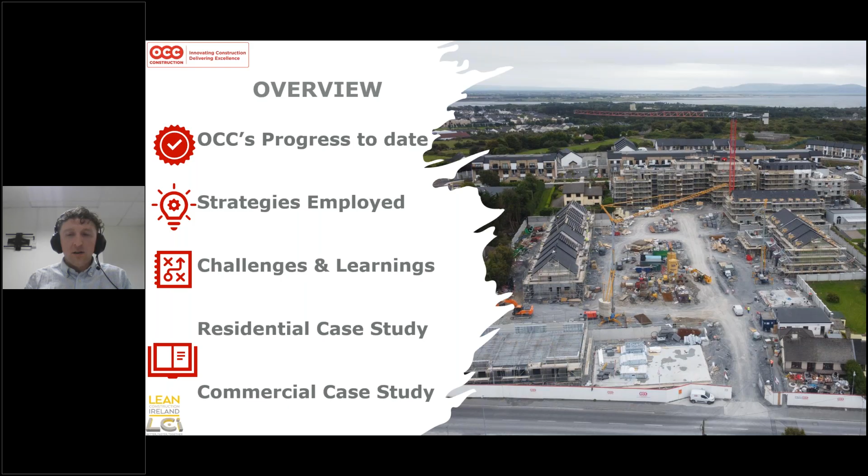Our lean construction journey started in 2021 when we identified the problem. Traditional build and delivery was not achieving results for OCC. There was a shortage of skilled labour, too many contractors on sites, sites running behind programme, and generally everything was working out of sync and we were failing across all sites.

So obviously we had to make drastic changes. Step number one was looking at changing how we actually build our houses. So we looked at the implementation of modern methods of construction and lean manufacture.

This led to us building our own off-site construction company called Greenframe and developing our own light gauge steel product, which is based out of a manufacturing facility in Derryfetta in northeast Galway.

This allowed us to focus in on the structural elements of our buildings and maximise efficiencies on our factory floor, take away any dependence on weather and so on, and really ensure that we can get the best value for money and minimise as much waste as possible through the manufacture process.

Our next step then was design process improvement. This is focusing on collaborative planning and workshops at early design stages, including the subcontractors as part of our design team on design and build projects.

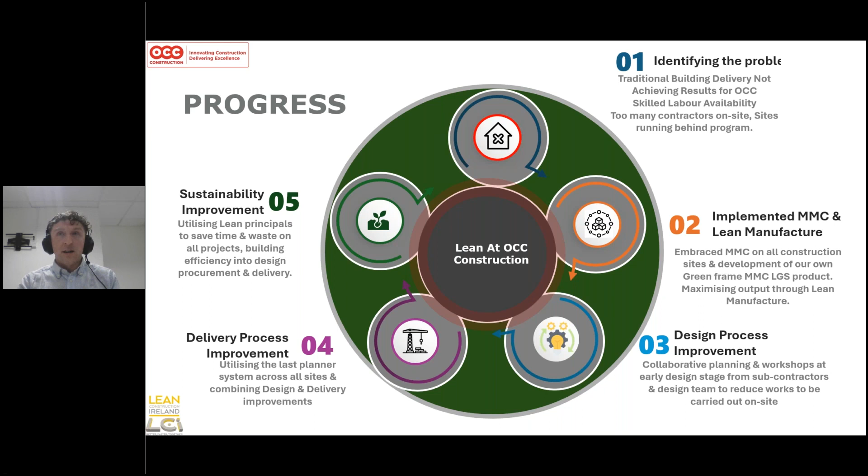And the final step and what we're on at the minute is sustainability improvement. So this is bringing all aspects of the business together and utilising lean principles from purchasing, from an initial pricing through to delivery, including purchase and design and at handover stage.

So just a couple of benefits from the past 3 years of utilising lean construction across our sites. We've gained a greater sense of cost certainty on projects because we're guaranteeing meeting tighter programs across our design and build projects. To date, all lean construction projects have been delivered on time.

And we're decreasing the program. Overall, we're looking at a 20% saving in comparison to where we were in 2021 with traditional building methodology and no real great organisation to where we are now. This does result in a lot of overheads savings, and also the maximisation of labour resources saves a lot of money for trades on sites.

Regarding quality testing certification, because we've had greater collaboration at the early stage of the project from subcontractors and the design team, we're finding a lot less issues when it comes to getting material certification and fully compliant systems brought all the way through the construction process, because it's delved into deeply at an early stage rather than being drip fed throughout construction.

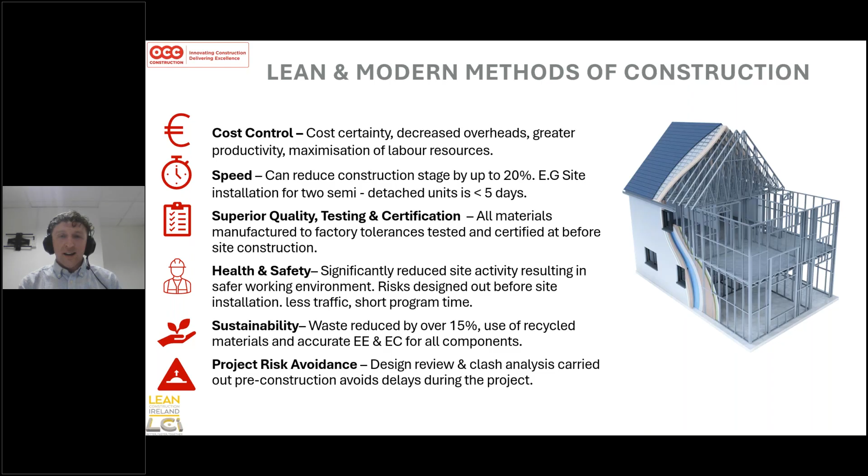So just looking at the current strategies employed, we've invested heavily in MMC. We're aiming to maximise the capabilities of the latest technology, primarily in light gauge steel, but we also use different building types depending on the site.

Looking at design improvement, we've created our own light gauge steel product, Green Frame light gauge steel, primarily used for construction of buildings between 3 and 5 stories. That's the sweet spot for that system. It's currently 250 units ongoing. And in commercial, we are utilising timber frame when we've units of 1 to 2 stories.

Then looking at process improvement, so how are we making things better on site? We are utilising insulated concrete forms where applicable on site, and then looking at actual construction delivery, we are implementing the last planner system fully, from initial idea conception through to handover.

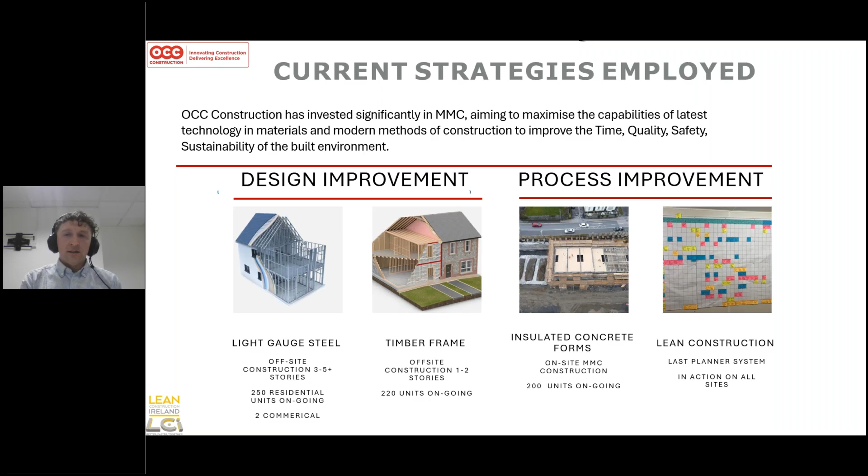So I pulled this together just to show you basically what we are using in OCC as part of the last planner system. By no means are we experts, and I know each company will be different depending on how you're set up and what projects you're on, but this is how we are running our last planner.

Starting off, you'll have your master scheduling, which typically is the full duration of the project, and it can take the form of the picture on the right hand side there, which is a phase plan, but it'll be fully expanded. The idea of it is to get your full construction program on one wall in your meeting room.

And this will set your phase durations for the project, which you can break down into your look-aheads, and it'll identify any major constraints of overlapping trades.

Then we move on to phase planning, so what you should do. This is your pull plan system. Based on the phases you've broken up in your master scheduling, you pull together a phase plan like is pictured on the right hand side. And this is built with the subcontractors on board.

I know with procurement and projects, it is hard to get subcontractors involved at an early stage, but it really does pay off if you can get them on board to make your phase program. The way we tackled this was scheduling similar trades together - bringing in M&E together, bringing in any structural trades together, facade completions, groundworks, and so on, and sitting down and going through the board for probably 2 to 3 hours, taking everyone's idea into consideration, whether it's the ground worker through to senior management of the company, to ensure we squeeze the program in any way possible and maximize efficiencies on it.

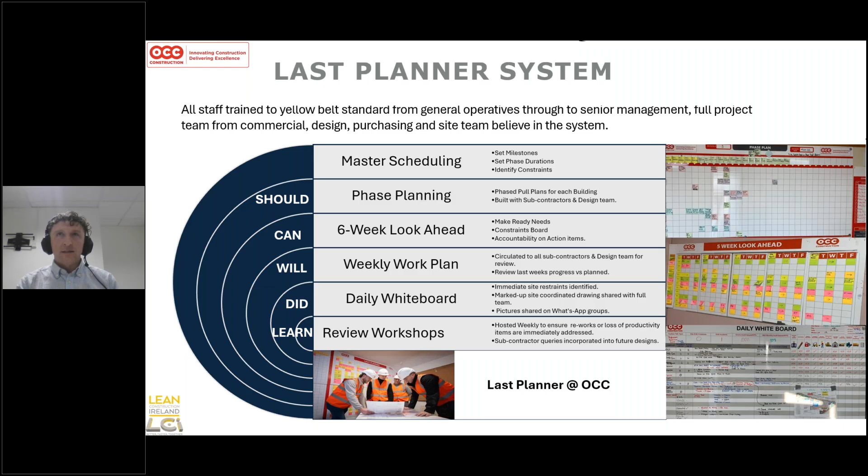So I'm just going to bring us through the Kinvara case study. On this project there were 28 units, and we use this case study of ourselves. It was the first project we utilised the green frame light gauge steel system, and we also tested the AMVIC ICF system in phase 1 and phase 2 of the estate. This was the first project that we fully implemented the last planner from design all the way through to completion.

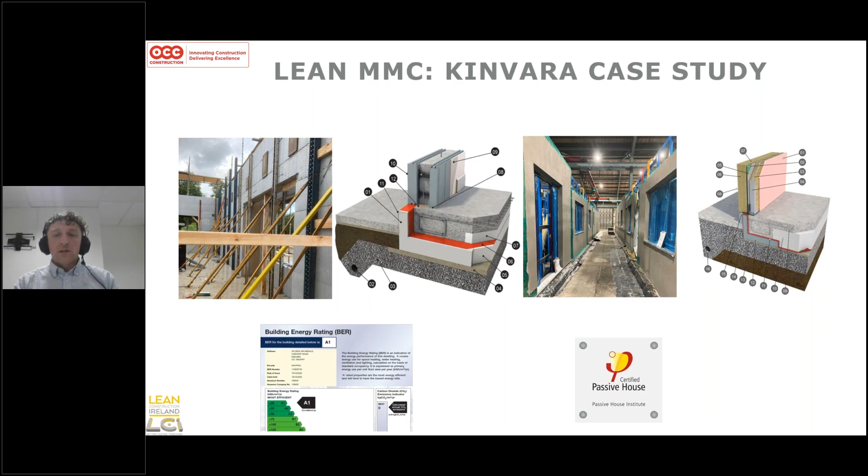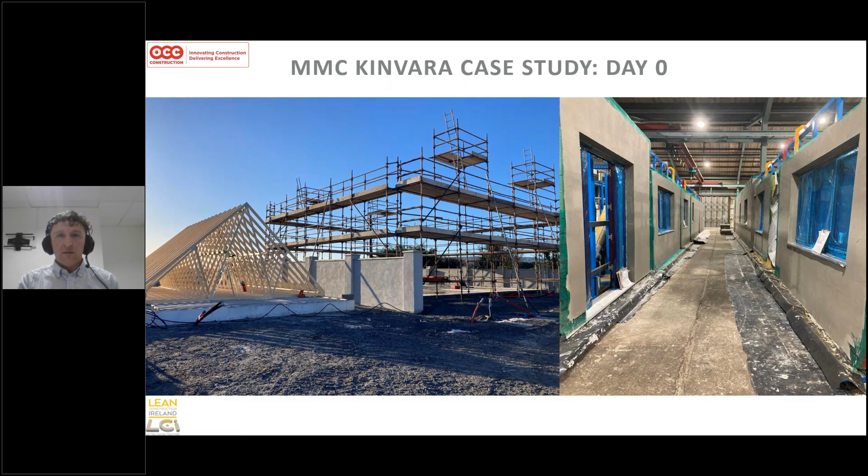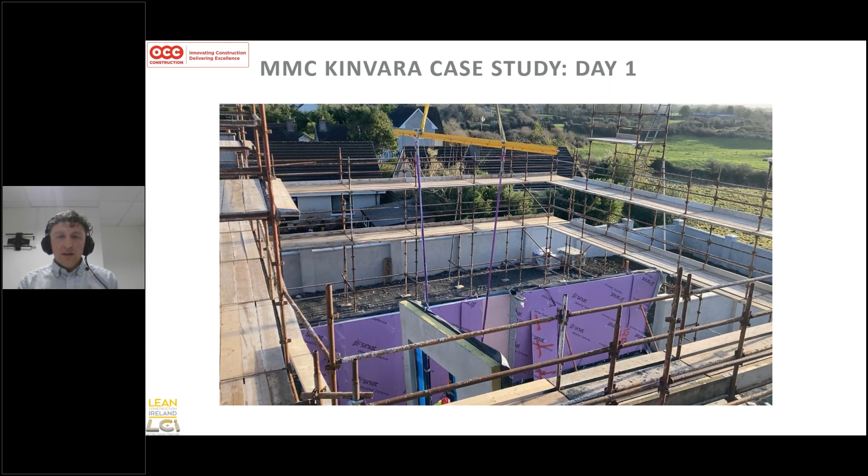So just have a series of videos here of a typical block of semis going together. Day 1 on site, all the ground floor wall panels are lifted into place. You'll see the service opes in the panels. Through collaboration with the M&E contractors, we've pre-drilled all the mechanical ventilation, and also made allowances for the electrician with grommets built into the walls, so when they're running the cabling it will be a very simple process.

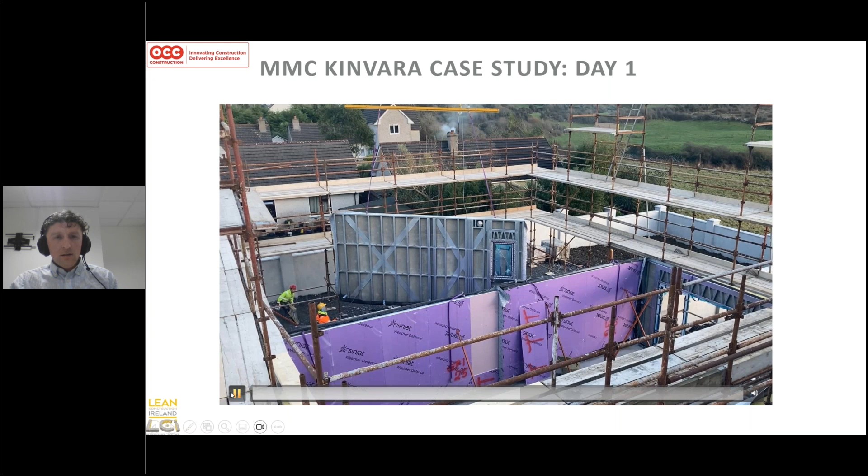Day 2 on site, we are lifting in floor cassettes, which have made provisions for all the M&E, so the mechanical pipework has already been set in place, saving for any works on site for the mechanical contractor. As you can see, it's a windy day in Kinvara and the panels are blowing nicely.

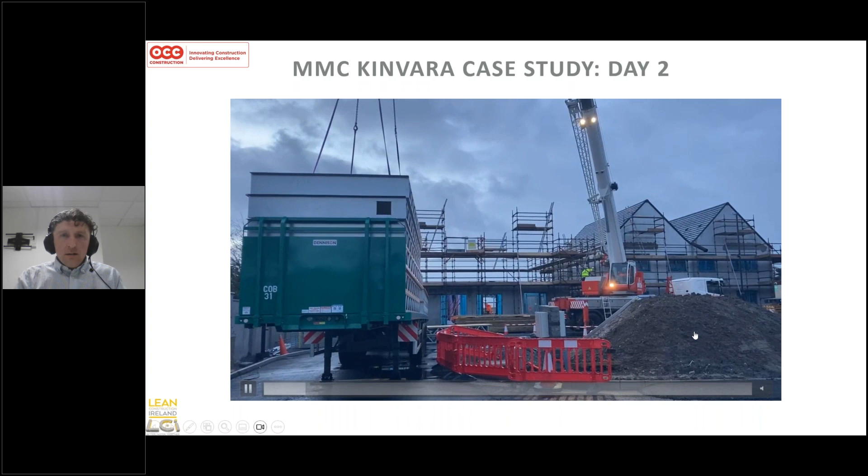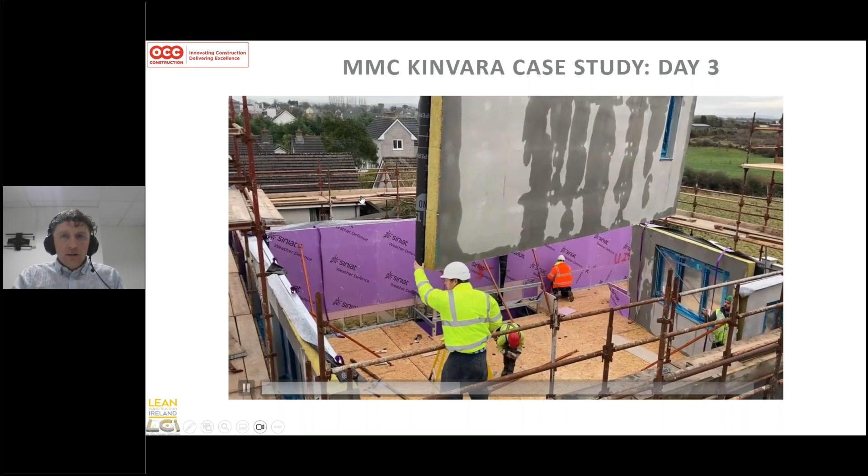Day 3, we have the upper ground floor wall panels. Taking this panel as an example, all the air tightness membranes are already in place and overlapped internally, so they can be joined with ease, which helps with the air tightness.

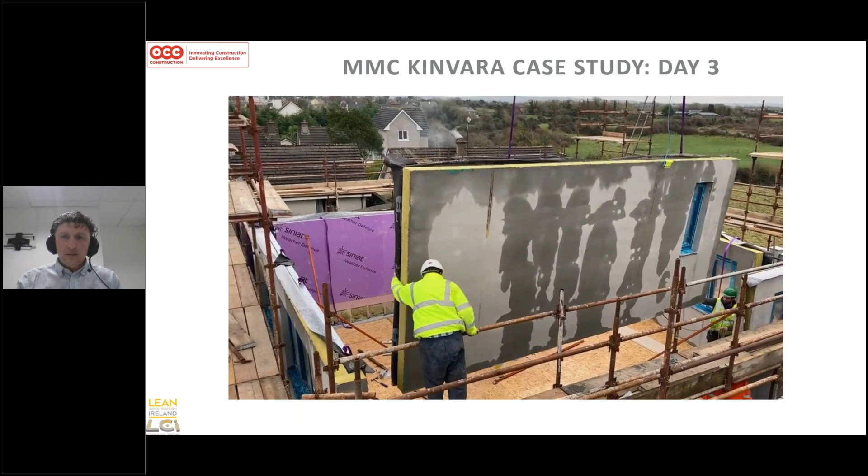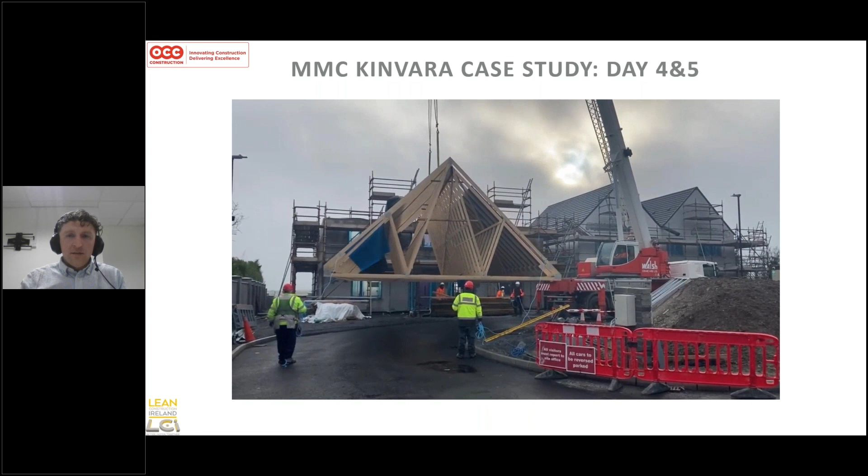Day 4 and 5, the roof has been pre-assembled on site and lifted into place. Final day, gables are on, roofs are latted and felted. So by the end of day 5, you have a fully airtight, fire compliant, weather tight block of semi-detached houses.

The first units obviously didn't come together like that, and the only way we achieved this was using each block on the estate as an opportunity to learn for the whole project team, from teleporter driver driving on site through to senior management. So that was the final block of semis in the estate. You can see a lot of the learnings have been incorporated, and all the ideas from subcontractors were incorporated to make their life easier. Regarding finishing the units, in a period of 6 weeks, they were fully finished and houses were ready for handover. A lot of this was mainly down to collaboration and bringing everyone through their lean construction journey.

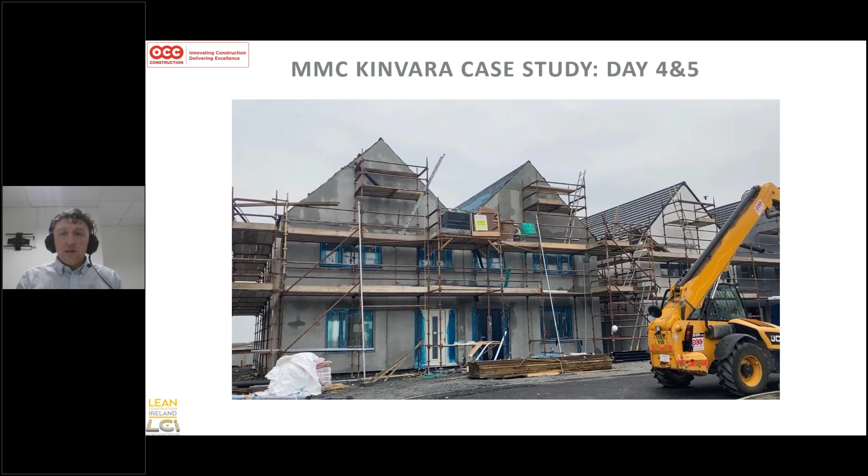Just taking a look at a Galway case study. So here's a project on the east side of the city. There's 102 units we're currently working on.

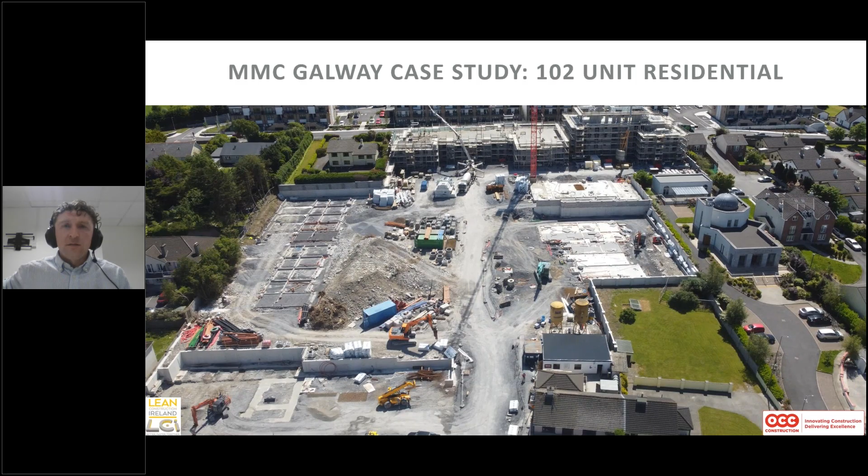This is a snapshot from last March. In the rear development, you've 2 apartment blocks and a selection of houses all the way through. So again, we went through the same process here, taking a block by block basis and making changes all the way through from subcontractors tying in with the design team and through nearly all elements. Each block got more efficient as we went along, and it's still a learning process.

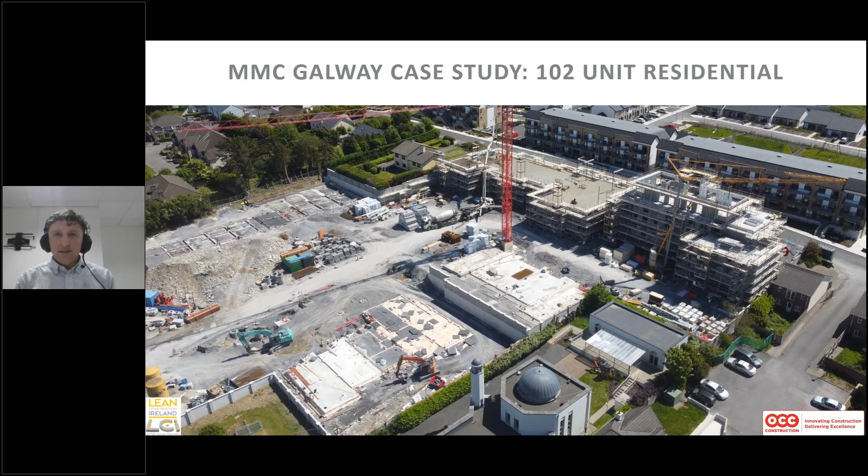Just looking at the same site 12 weeks later, you see the 2 apartment blocks in the rear have been completed and the houses done through the estate, and the duplexes have been erected, with the last units on the bottom left hand side being the most efficient to erect, taking approximately a week and a half to get all the structure up and roof on. For a block of duplexes, this was a massive win for all involved.

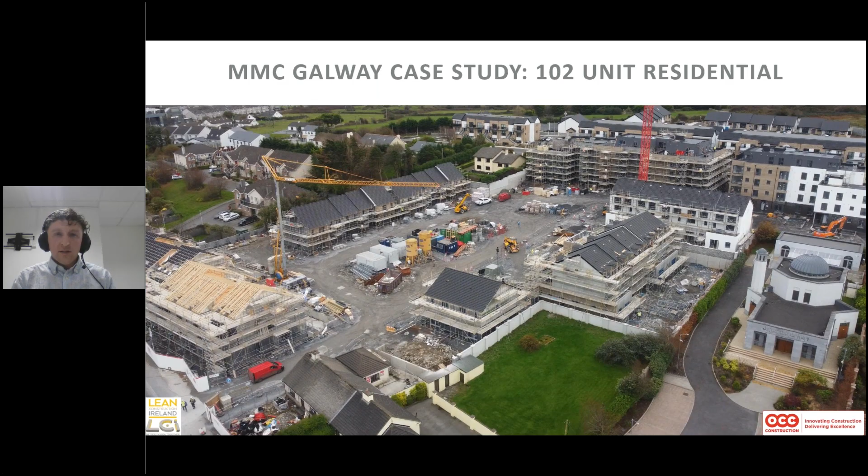Regarding the commercial case study, this was actually the first commercial project we used lean construction on, and it was the first one where we really saw the results of the last planner system.

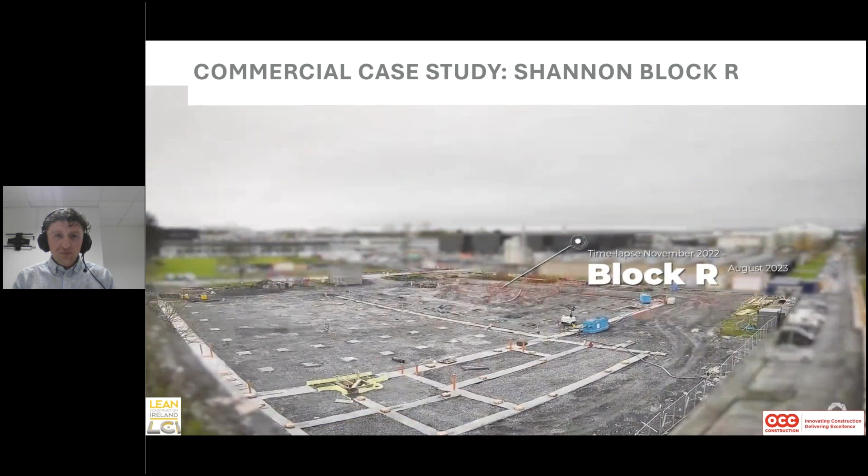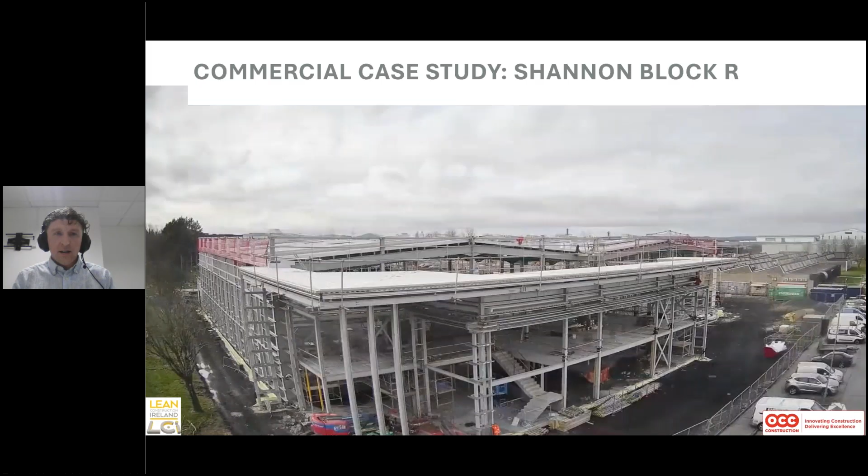It looks like it goes together like a jigsaw puzzle on the video, but in reality there was a lot of planning that went on with the design team. This wasn't design and build, it was a client-led design team which bought into the last planner system, and that was ultimately the success of the project and its delivery.

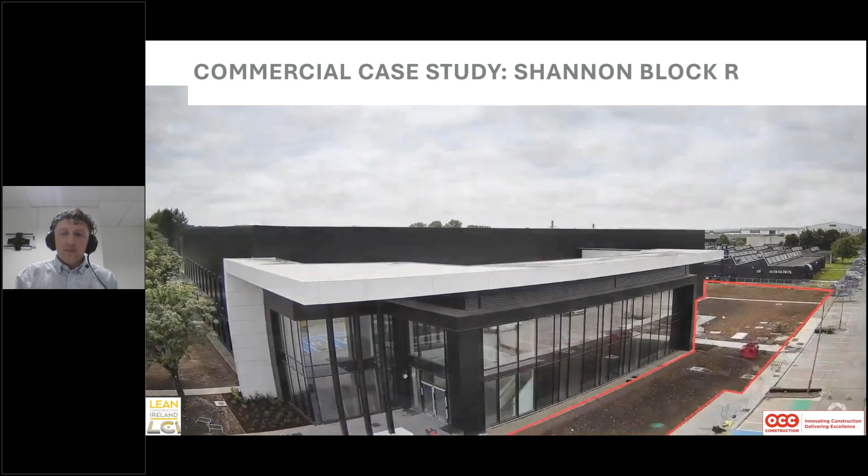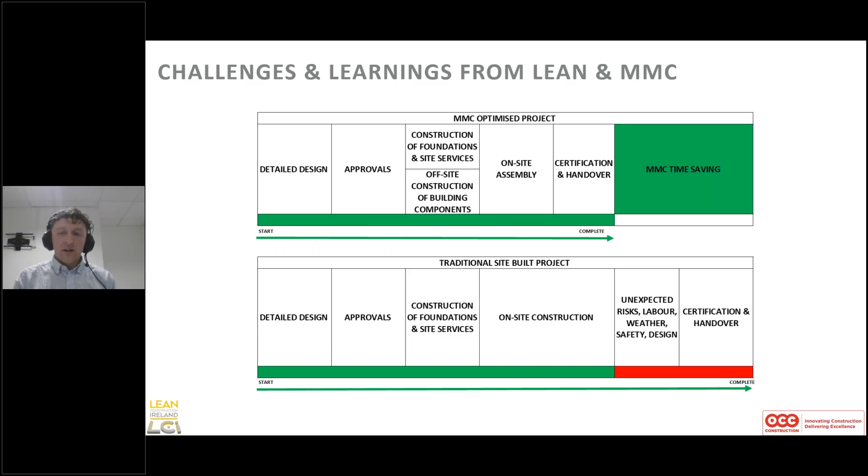Building on the challenges and learnings from lean construction and MMC, there is a need for greater collaboration between the contractor, design team, and planning stage. We found the best way to facilitate that is through implementing last planner and making everyone accountable for their delivery dates on a weekly basis, breaking it down rather than giving design teams free rein and prolonging the design program.

Design freeze: the more time we can spend in pre-construction stage getting views from different trades, and the more heads you can bring together while playing around with a 3D model before we go to site, we're finding that you're saving 4 times the amount of time it would take to fix that problem on site.

It's a continuous improvement process from when you're building on site, fully maximizing how lean you can get. You're never going to be perfect, but you can always be part of an improvement process.

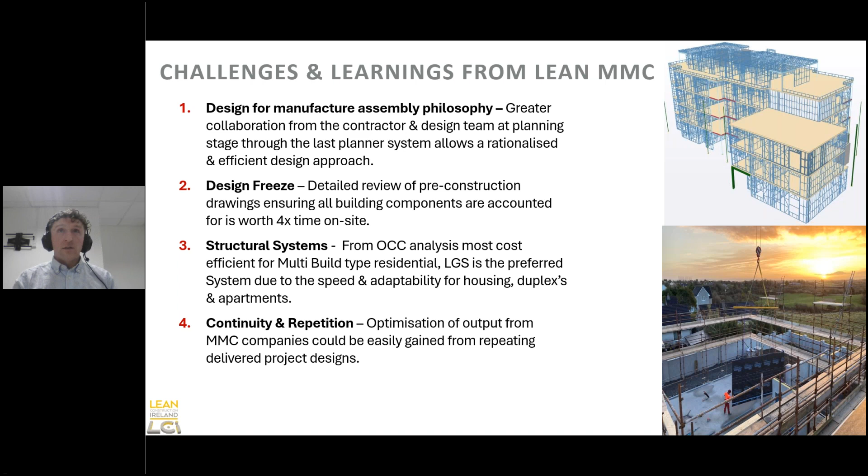Just giving a snapshot of what's next for us regarding lean construction. There is a modern construction campus built in Mount Lucas in Q3 of this year. We are going to be involved in 5 of the units, and we are hoping to fully document and record our lean construction process and our last planner process, and make it available to all involved, just to see how lean we can actually make a unit. We will have different build types down there between semi-detached houses, terraces and apartments, and it will be formed into a case study available for all in the future.

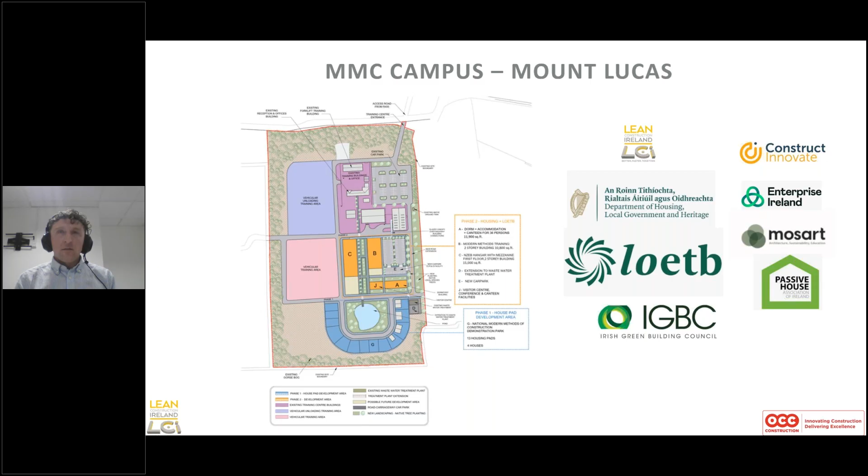And that sums up my presentation today. I look forward to any questions you may have.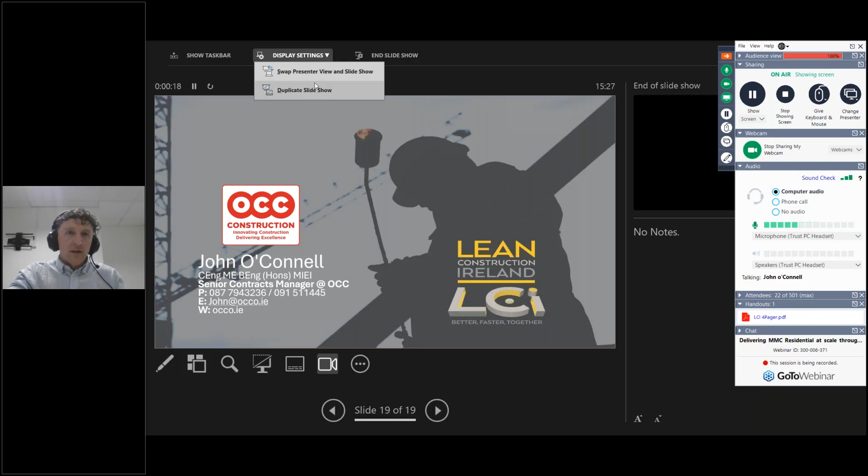Another question: by how much time did the design duration increase? It didn't increase, because we fully utilise the last planner system. Typically when you're working with a design team and they say they'll need a pre-construction phase of 3 to 4 months, there's very little accountability on what they're actually going to deliver on a weekly basis. But if you bring them into your last planner process and review it weekly, seeing how they follow through on their action items and whether they're accountable for delivering each stage of the building, we found it actually decreased the design stage process and made it more efficient for all involved.

How are you finding getting subcontractors involved in the last planner system? Initially it was fairly hard with subcontractors, but once you get their buy-in and they realise you're taking the planning of their operatives into your hands to make it more efficient for them—so at the end of the day they make more money and their life is easier when everything is fully coordinated and they can maximize their efficiencies on site. We've been working on it the last 3 years. It's not perfect at the minute, but it will be sometime in the future. The subcontractors, year on year, are seeing results, getting in and out of projects, and making money—I think that's the most important thing for them. Once you have a happy subcontractor, it's a happy life on site.